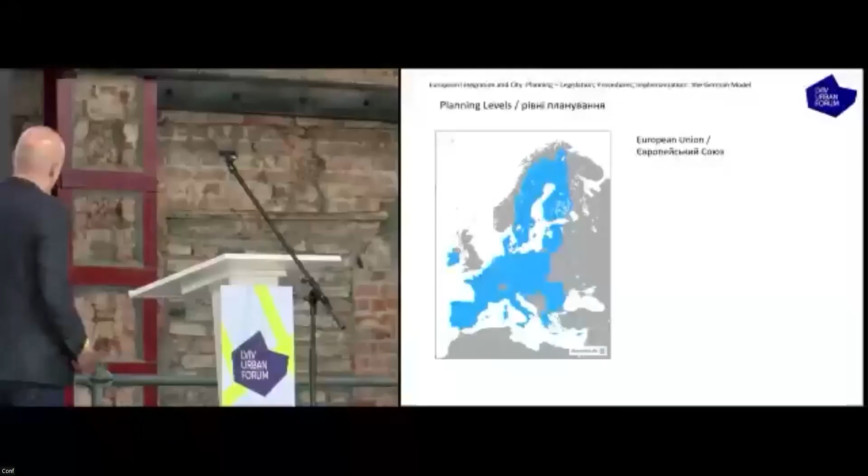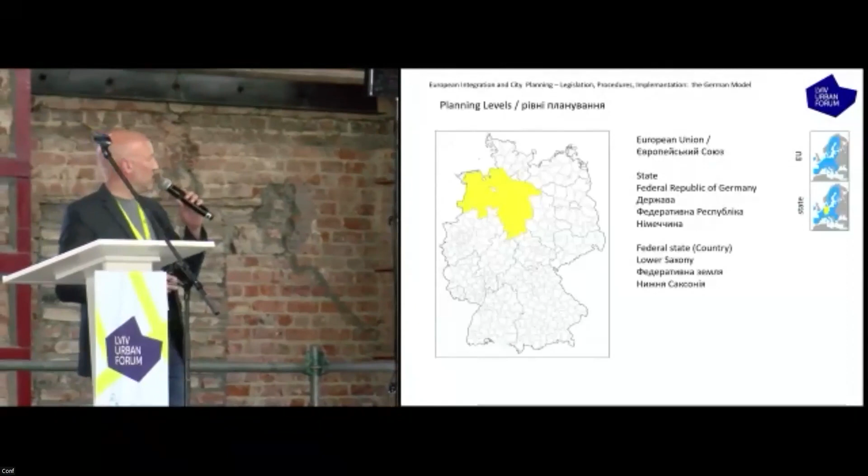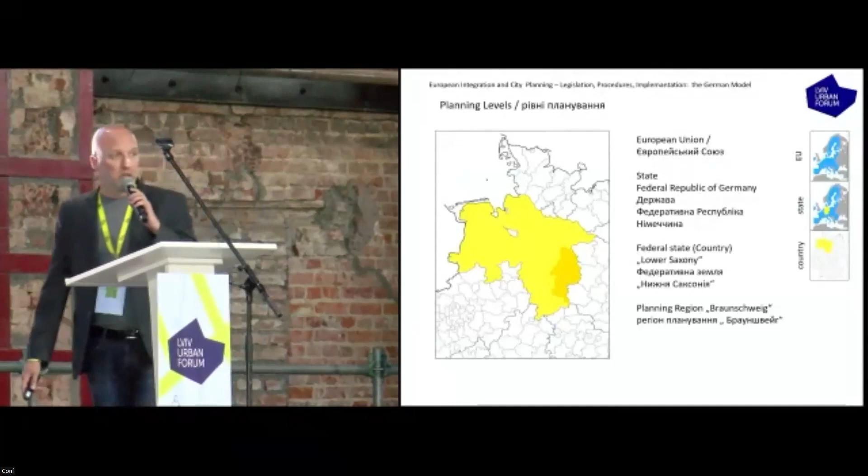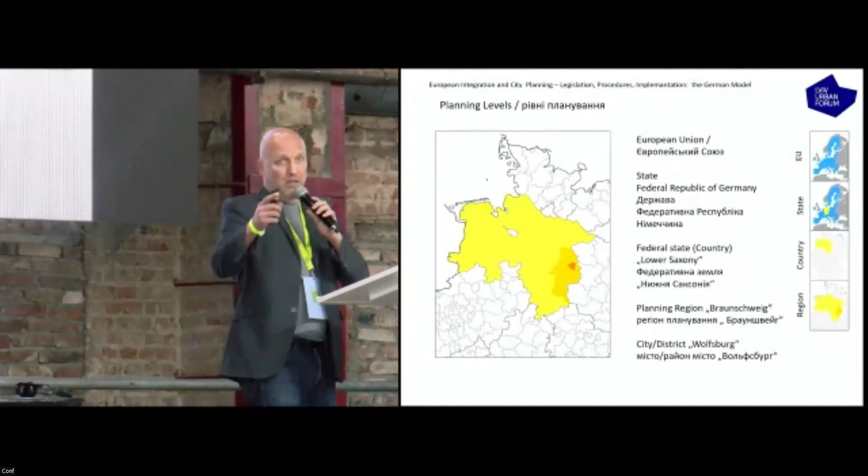I'm from the European Union, from the state of Germany, from the country - don't be shocked about the name, because there is no better translation from the German word Länder to English. This is the country of Lower Saxony, where I work in the region of Braunschweig and the city of Wolfsburg. So you see, you got 5 levels, and like Monsieur Duplantier explained in the last lecture, 5 levels is the same amount in Germany too.

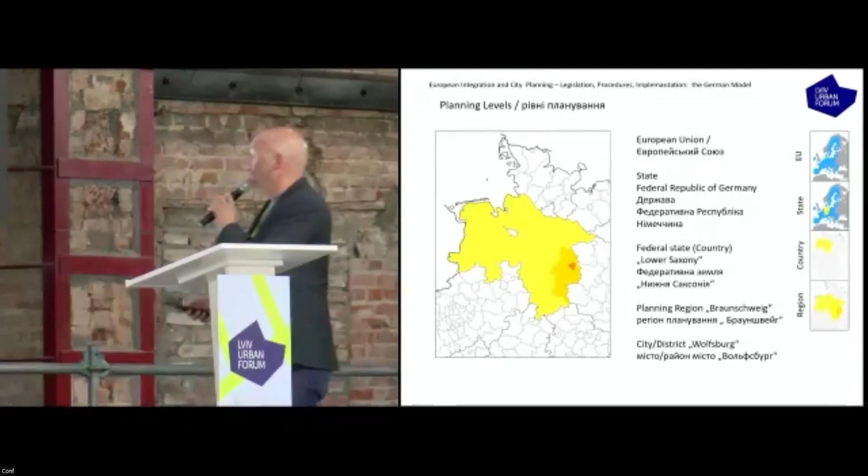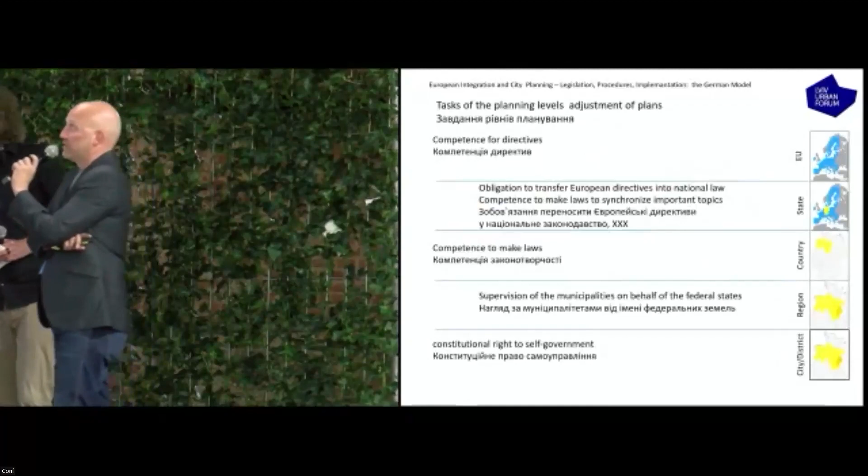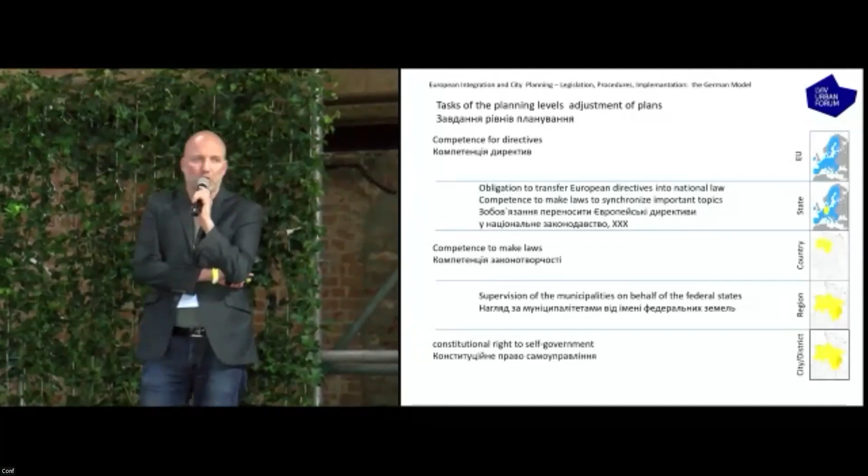So what is the task of this? We got different competences. We start at the European level - they have the main competence for directives. The state makes laws, and there's a special thing about Germany: the main amount of laws is not made by the government in Berlin, but by the countries one level below. Then we have a supervision and synchronization responsibility of the regional plannings.

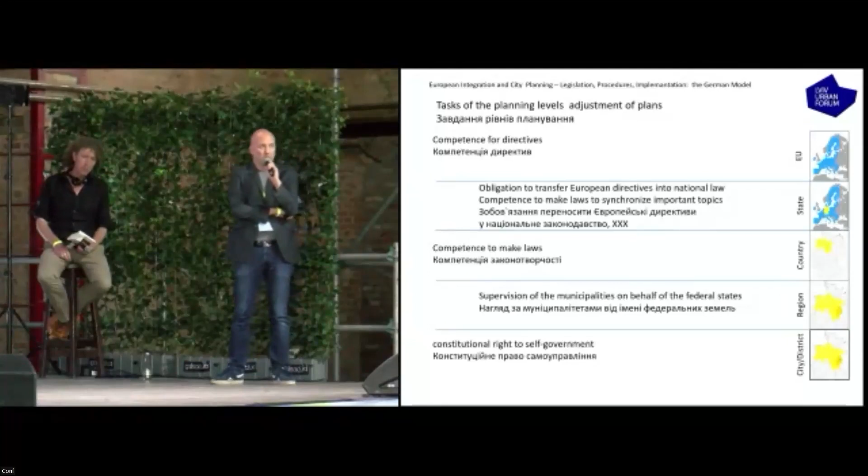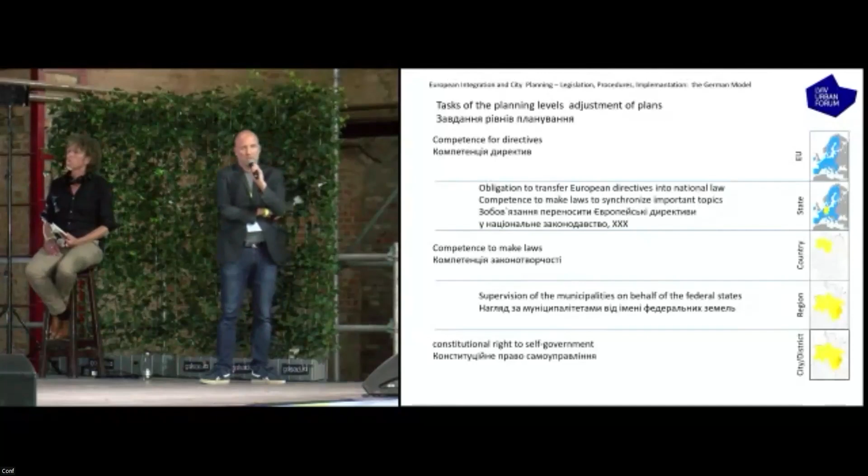And we have a constitutional right of self-government for every community. This is really important, because in the last lectures I heard a lot that you try to end the very central planning system in Ukraine. So in Germany, the self-government right is for the communities, and that's really important.

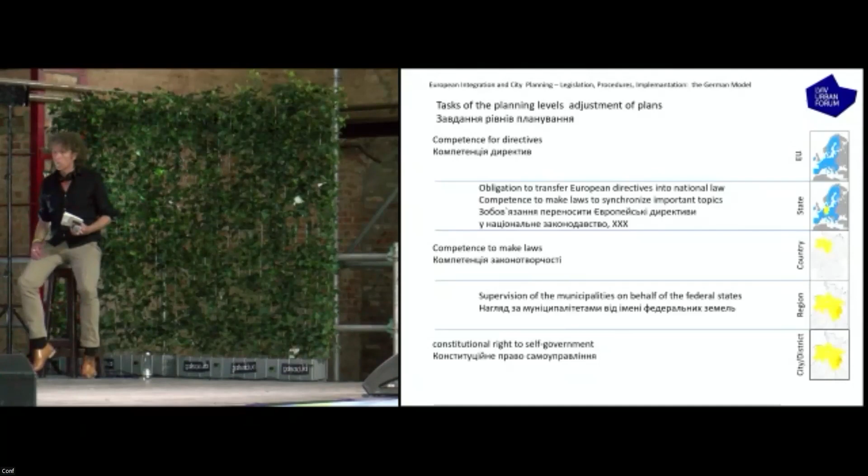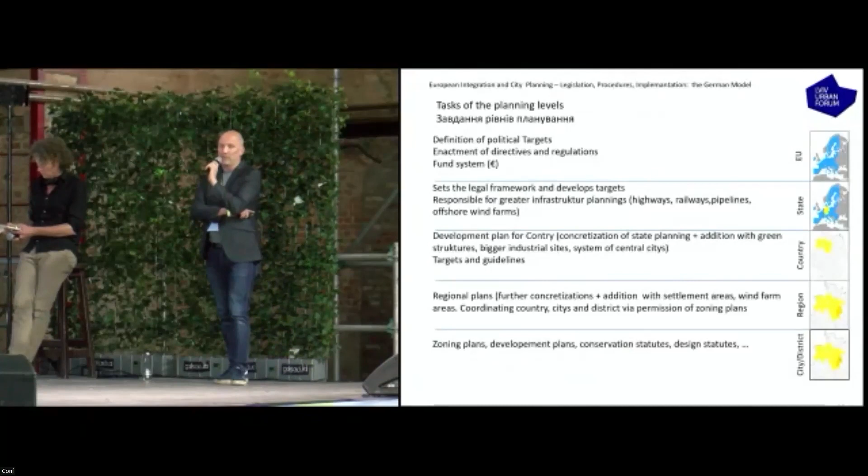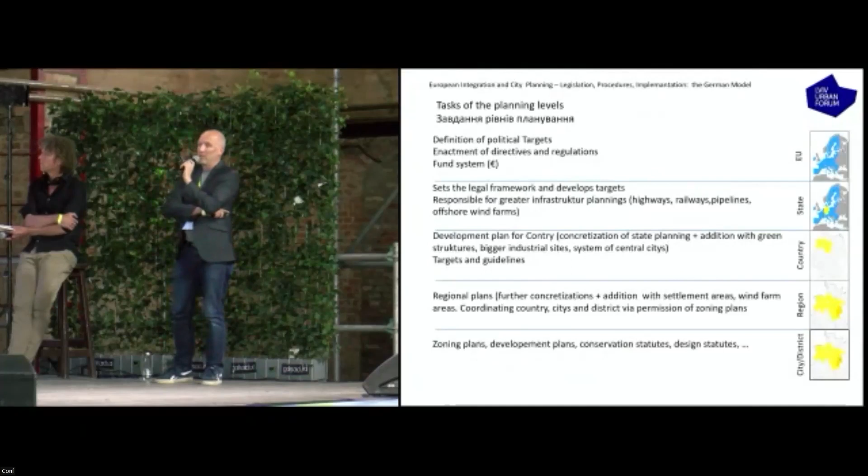And on these levels we have other kinds of planning. The EU defines political targets - they give regulations and directives which are concerned to be transferred into the laws of the member states of the EU. This is the work of the state government: to make these laws and plan greater infrastructure.

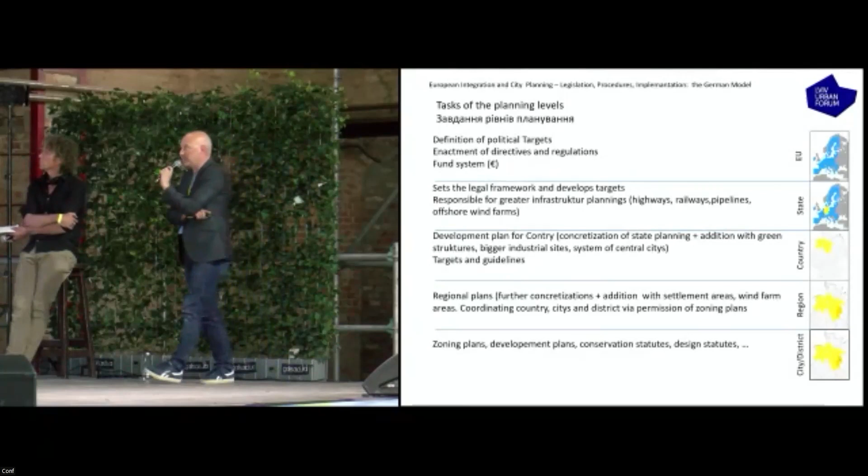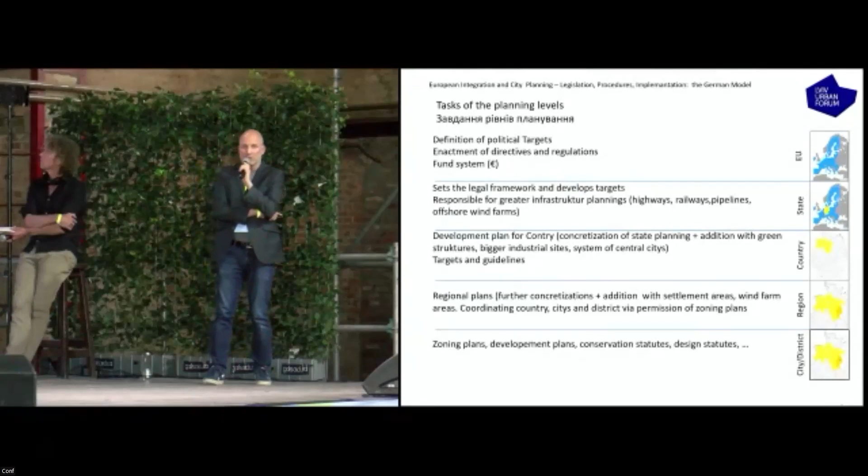And then we go down, and every next level has its own planning. So we got state and country planning, we got regional plans, and in the cities and districts we have zoning plans, development plans, and even conservation statutes - I'll come back to that later. This is the Ukrainian translation.

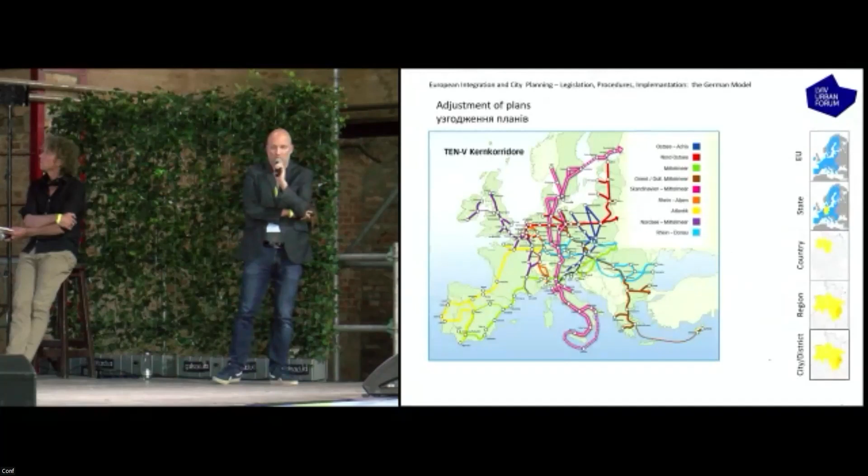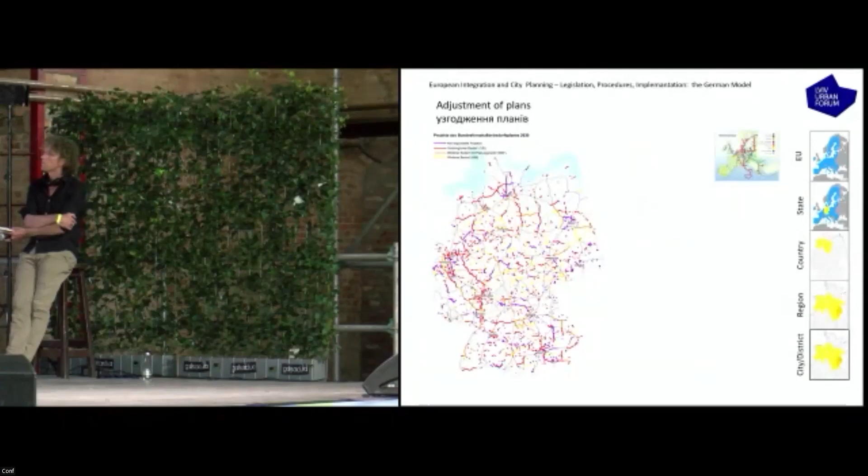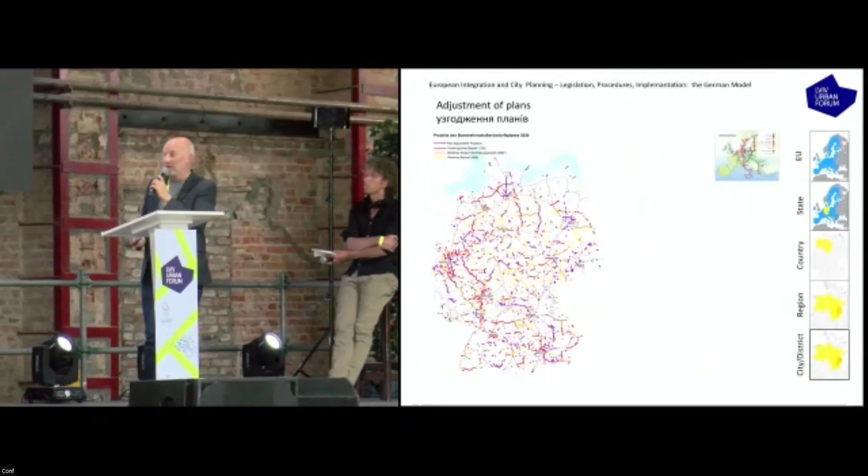Next level, state planning. This is the plan for infrastructure for highways in the Federal Republic of Germany, and you see here a lot of highways which we build, build up, or improve.

Then we go to the next level. In this map, you can imagine there is a line for the highway which wasn't showing on the screen for the pointer, so I had to check it up for you. Okay, so you have a highway line there.

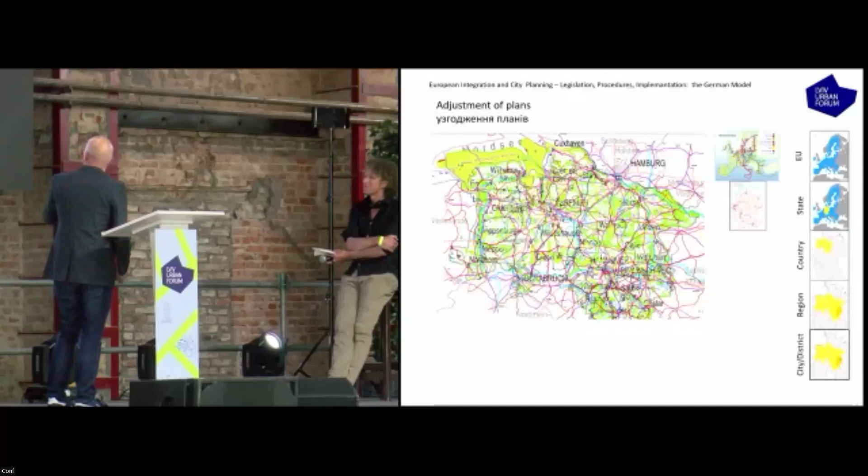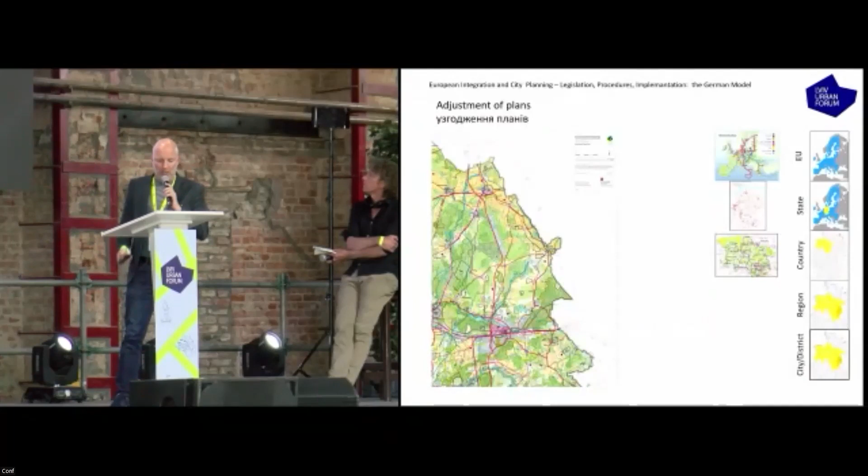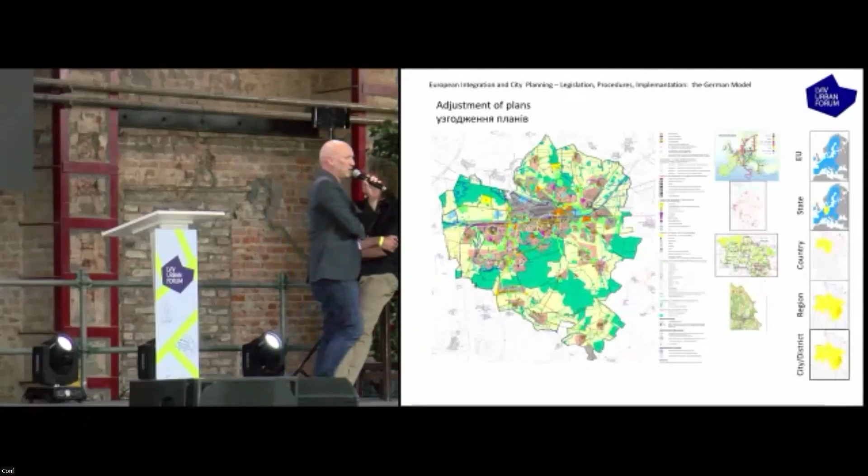Then we go up to the regional plan - you see a big red line coming up from top to bottom. This is the highway, and on the level of the zoning plan for the city of Wolfsburg, you can find this highway again. So this is a perfect way from the European idea to the state, to the country, to the regional planning, and then to the city - we are just synchronized. Top down.

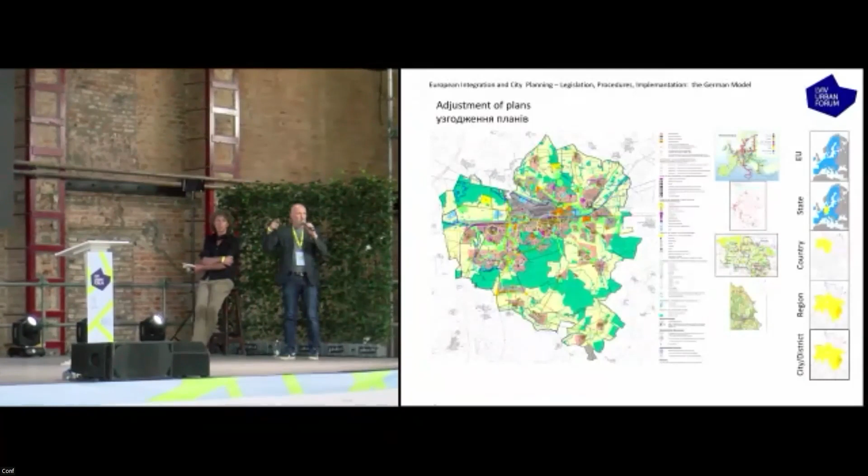What about bottom up? We got this countercurrent principle - that means not all ideas are ruled from Brussels down to my city, but of course we have a way from bottom up. This means everything at every level has the obligation to adjust their plans.

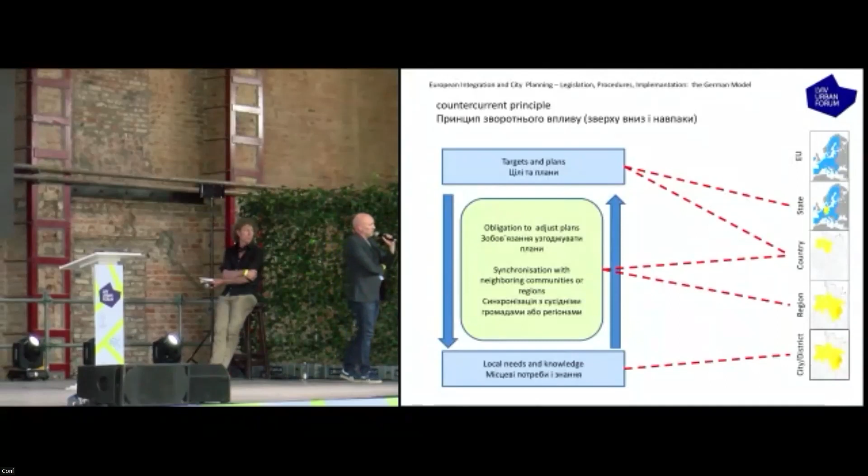So if Brussels says this is the highway track, the main direction, okay, we synchronize it to the city level, but we also have needs, and we often have knowledge about our location. This locational knowledge is impossible to have in the ministry, in the state government, or even in Brussels. This means we take part in the decision of where this highway is located.

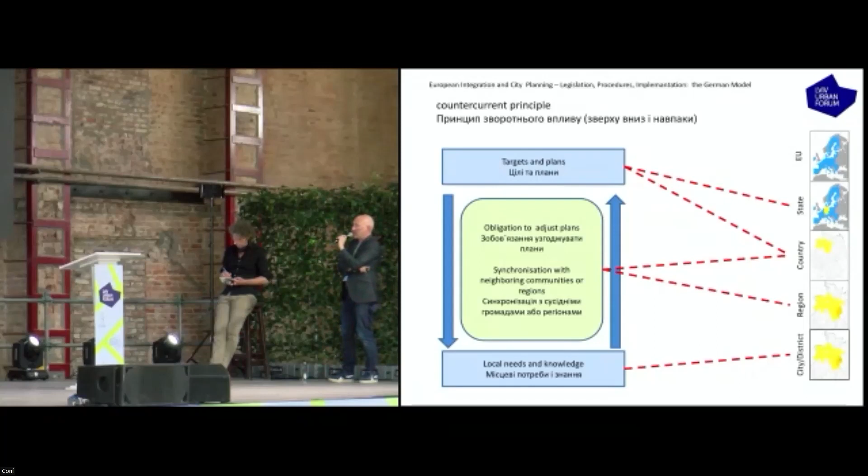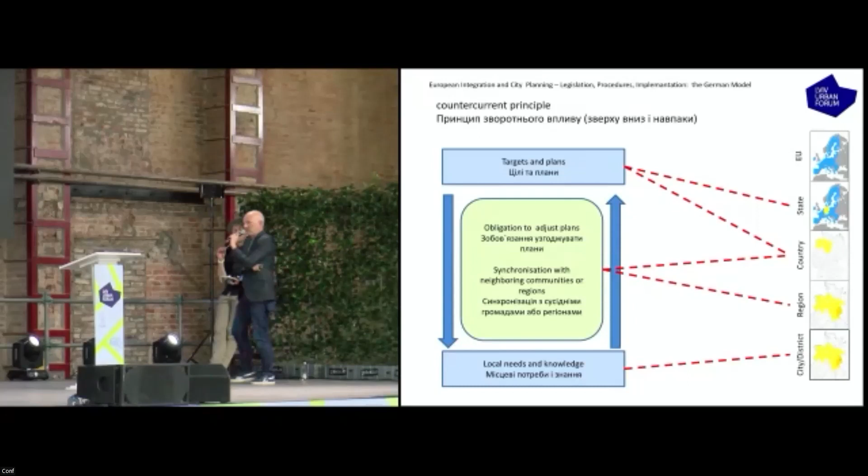And also we are urged and responsible to synchronize our plannings with all our neighbors - the cities in our neighborhood, the districts in our neighborhood, they have their own interests, and we have to make sure our plannings don't disturb the development ideas of these neighboring cities and districts. The responsible planning level to coordinate this synchronization is the region, the second level.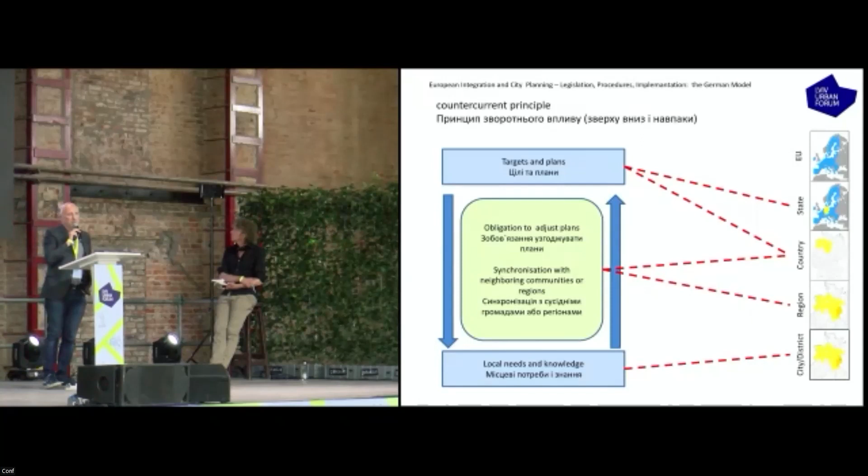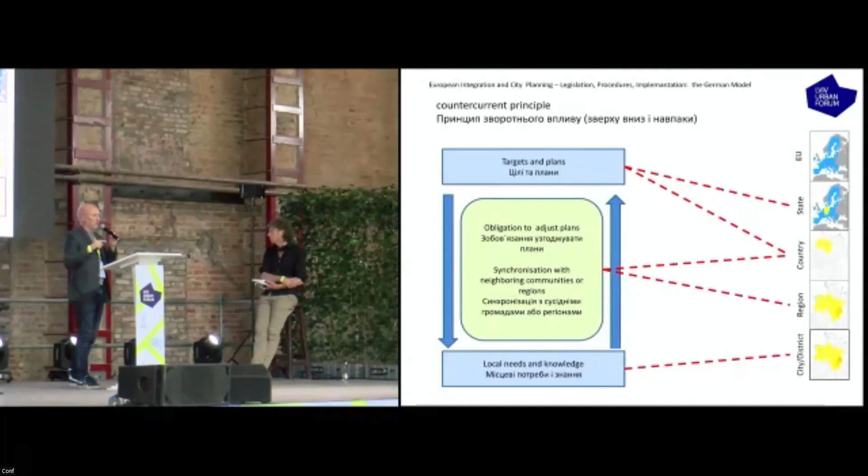In this regional planning, we have all cities sitting together in the regional planning area, and they have to make this plan by a decision which is a common decision.

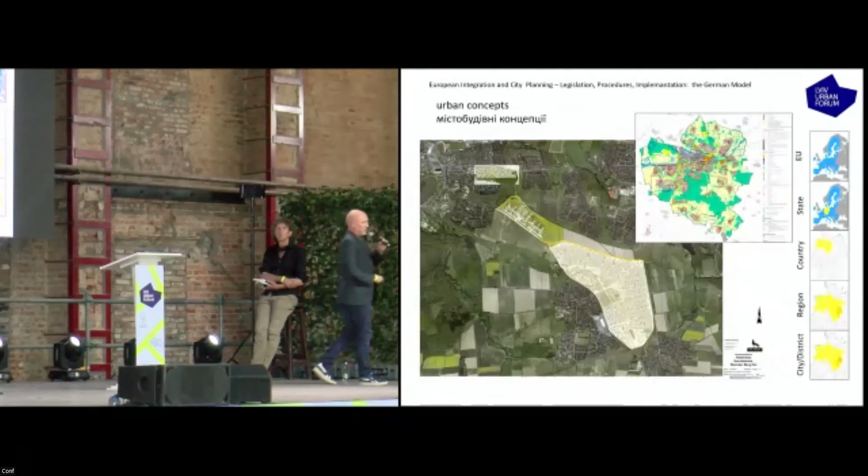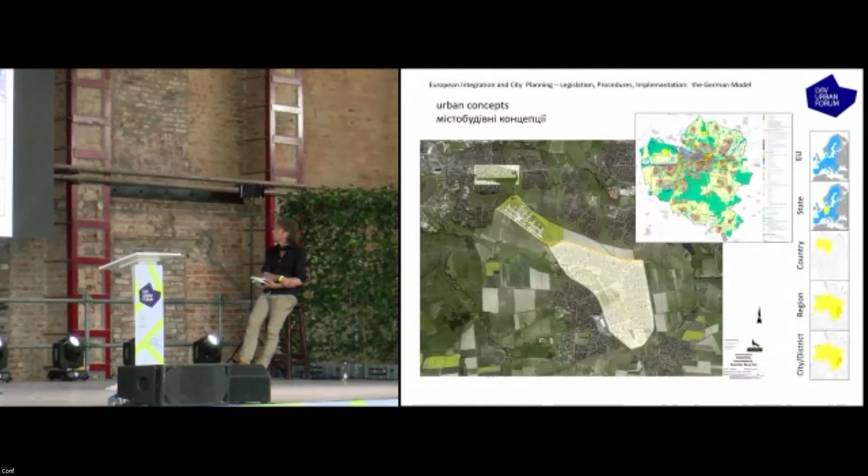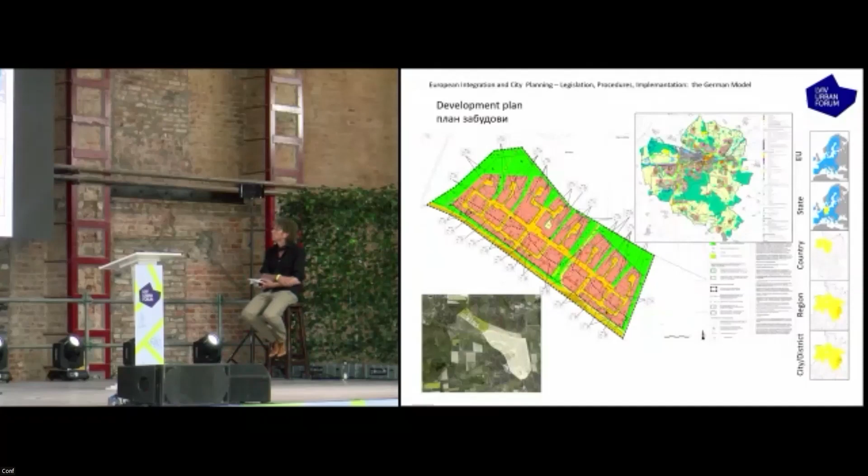And so we go bottom up. This is the planning of a settlement in Wolfsburg. We were defining some years before, and you see the zoning plan, and from this planning, we make a development plan. This is the legal law in our city for developers, buildings, and owners.

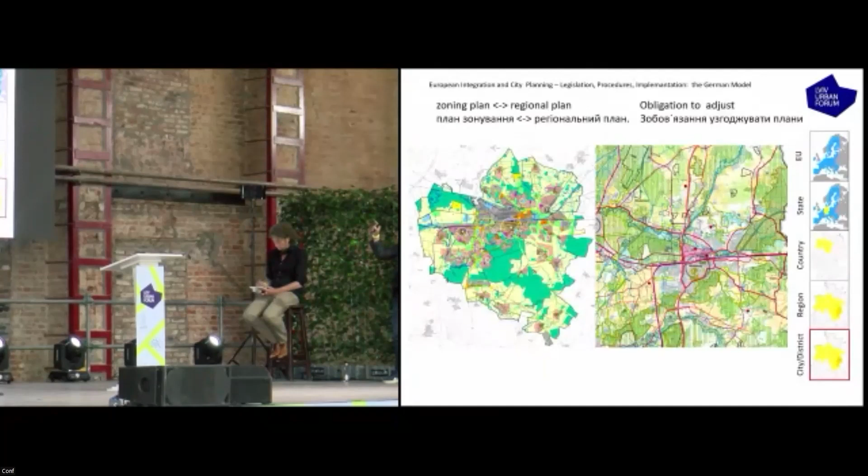And now we go up and say, okay, the settlement took part in a place where we decided in our city this place is a good place for a new settlement because it's close to the city center, it's well located to the infrastructure, to the public traffic system and so on, but in the regional plan it was a farming landscape. So bottom up means we go to the regional planning and say, we negotiate this plan by ourselves, based on our knowledge for our city, and say we want to change farming area into settlement area.

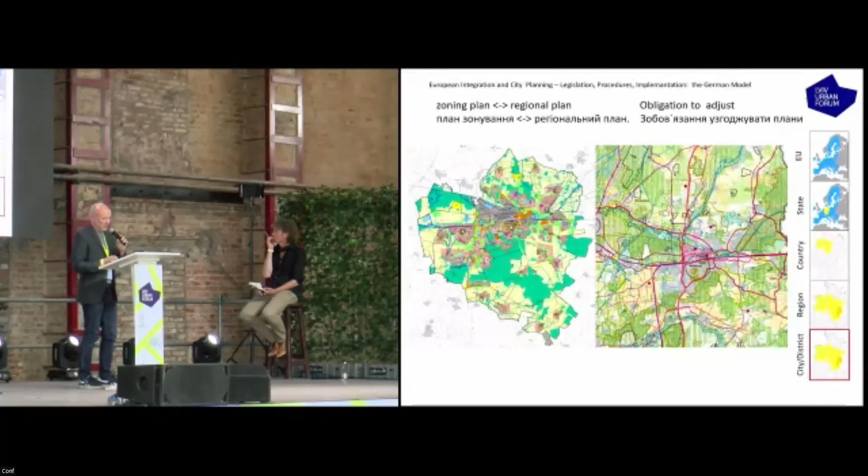And we have to apply for it, of course. It's not a self-fulfilling wish, so they have to negotiate with us. And these negotiations sometimes are very difficult.

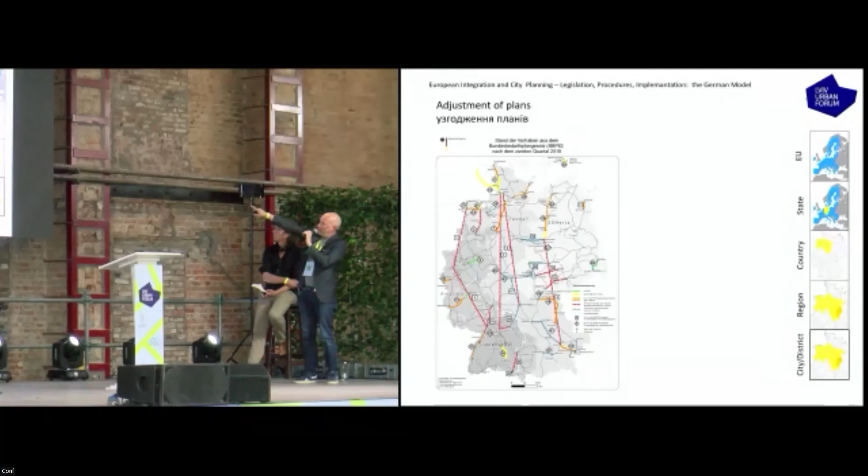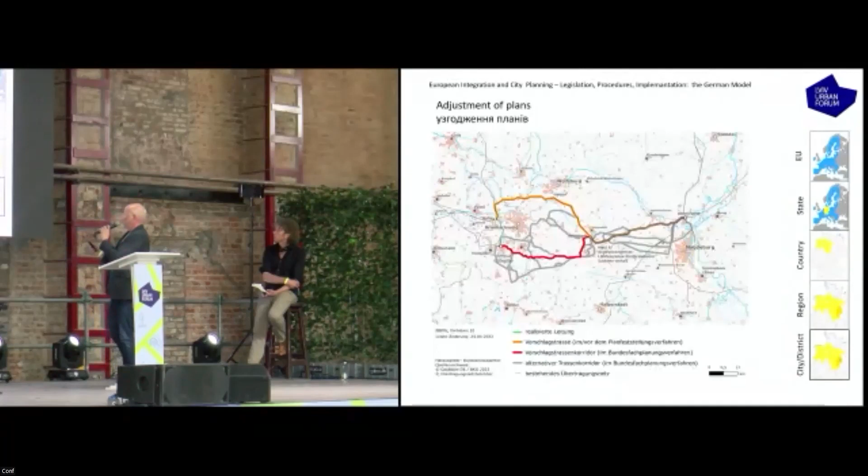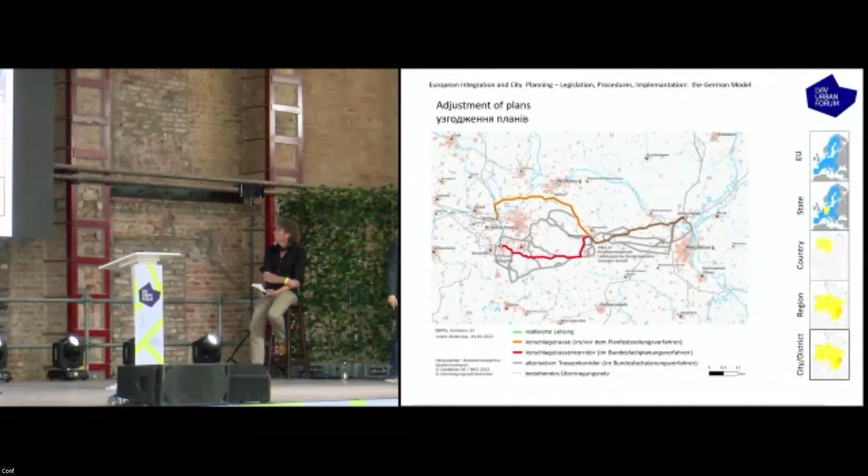You see here a map from the state government from Berlin, which is dealing with high voltage power lines. And in the middle, you see a thin blue line, number 10. It goes straight. Okay, that's the plan. We need a power plant line from there to there. But concerning all these regional knowledges and the rights of the cities and districts, in the end you see a lot of ways which have been checked, and in the end the orange and red one was the final solution to make this high voltage line.

Why all the other lines didn't work, I don't know exactly in detail.

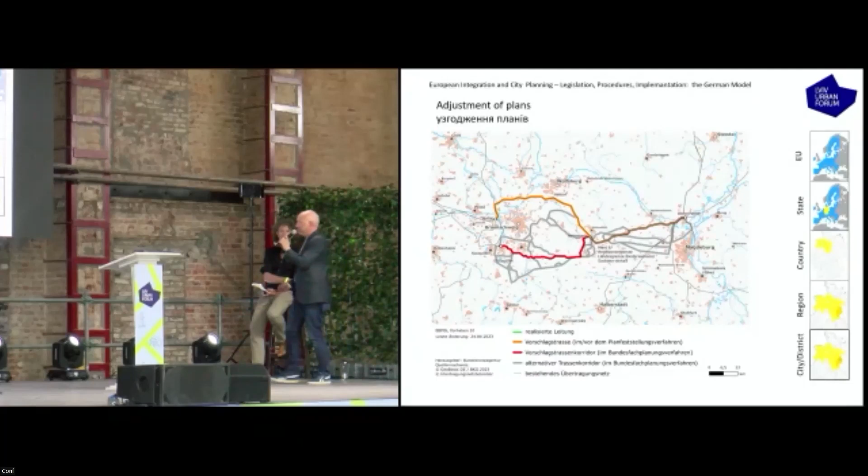Okay, what is inside a zoning plan? As you can imagine, we have a plan for the entire use of the city. It's not about heights or densities or architectural qualities. It's just for the use of the city.

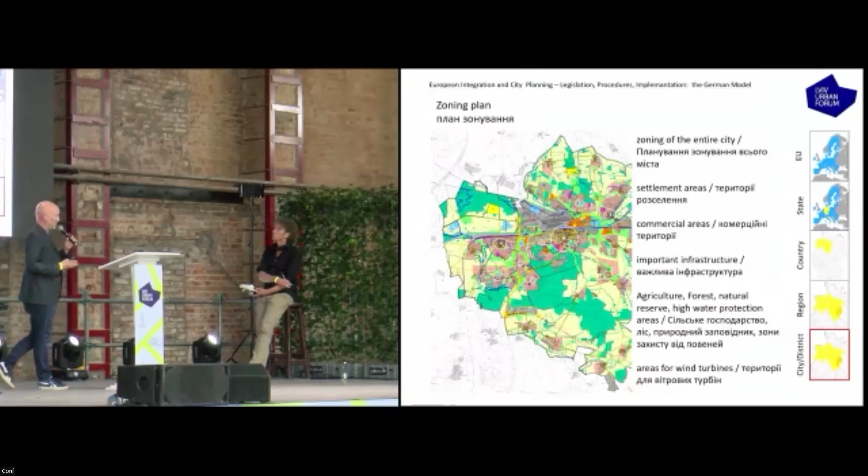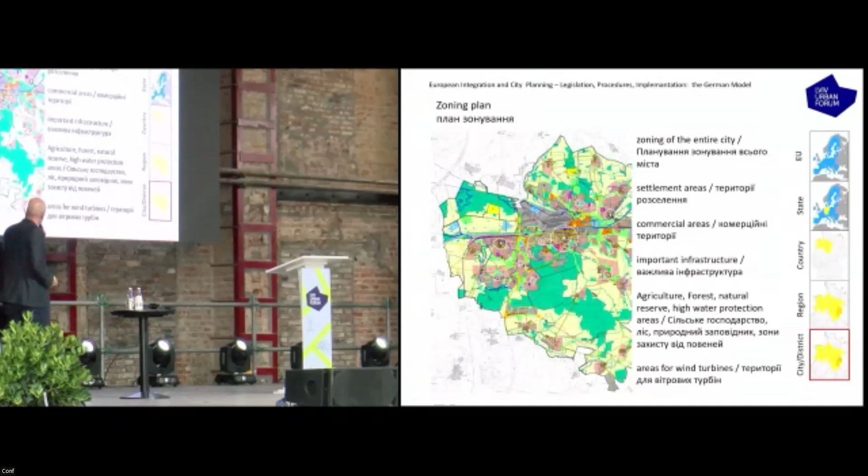And there we have the most important things: settlement areas, commercial areas, important infrastructure, such as water supply, water treatment, landfill, and all the other important things a city needs. And we have agriculture, forest, natural reserve, high water protection, and also areas for wind farms, wind turbines. This is all inside this plan, and this plan is decided by the city council.

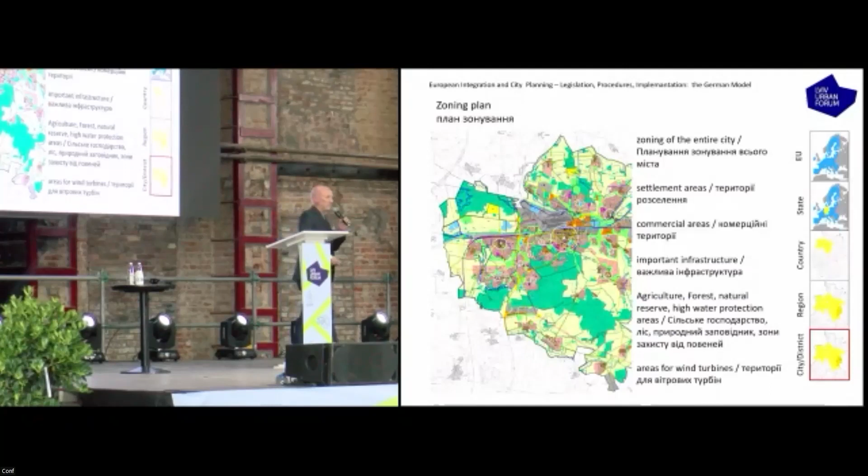So we make it by our own, and we have it decided by a city council decision. Next, further down, this is the development plan, and this development plan makes rules for the kind of use, for the density, heights, streets.

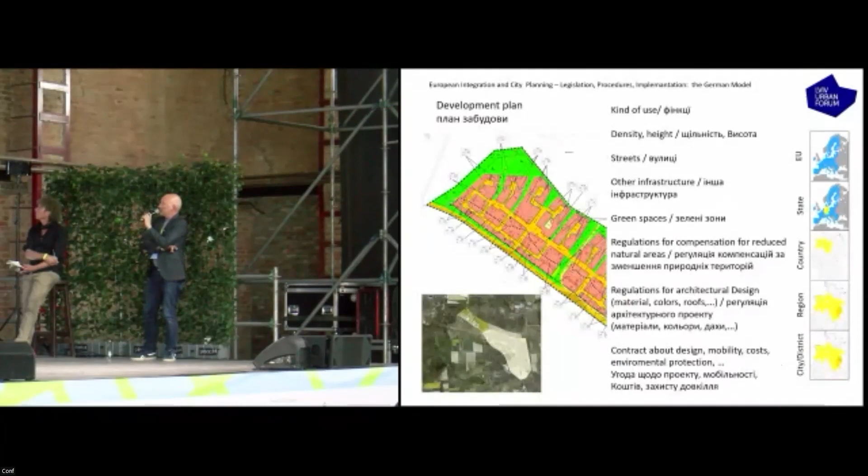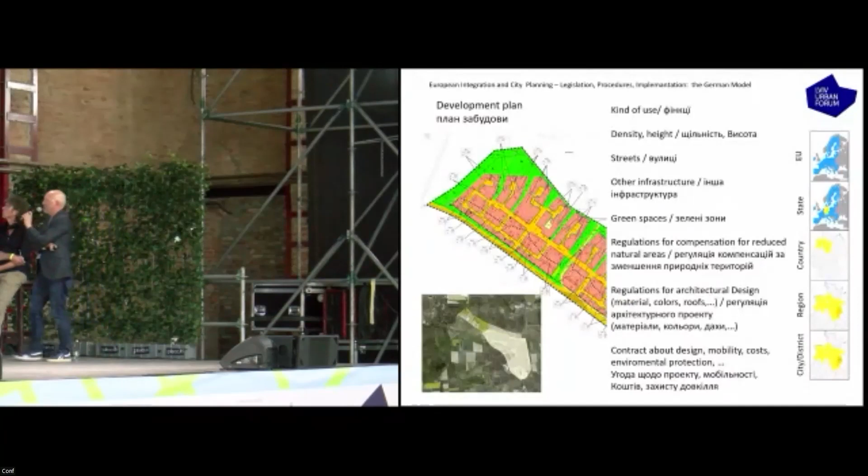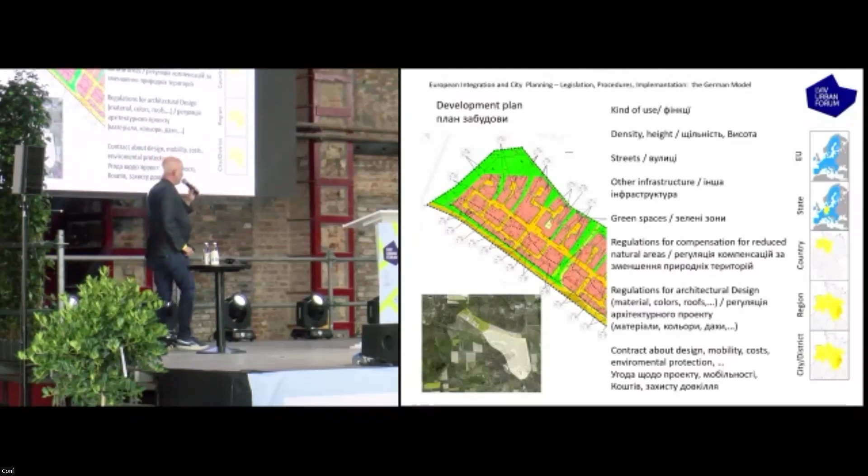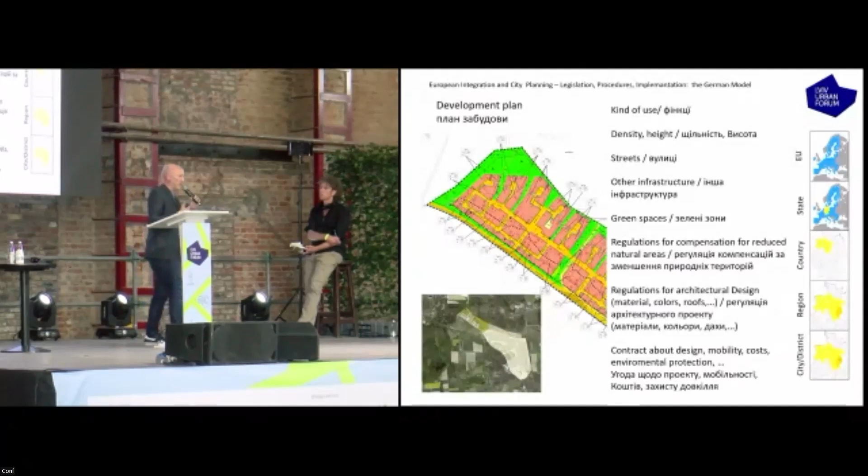He deals up with all the nature, let me look for the word, environmental protection stuff. And this is the point where the regulation and directions from the European Union come down to our planning system, because we have to make sure that the direction of the European Union for water, for high water risk, for strategical checks of natural reserve areas took place in this planning, and we have an answer for all these topics.

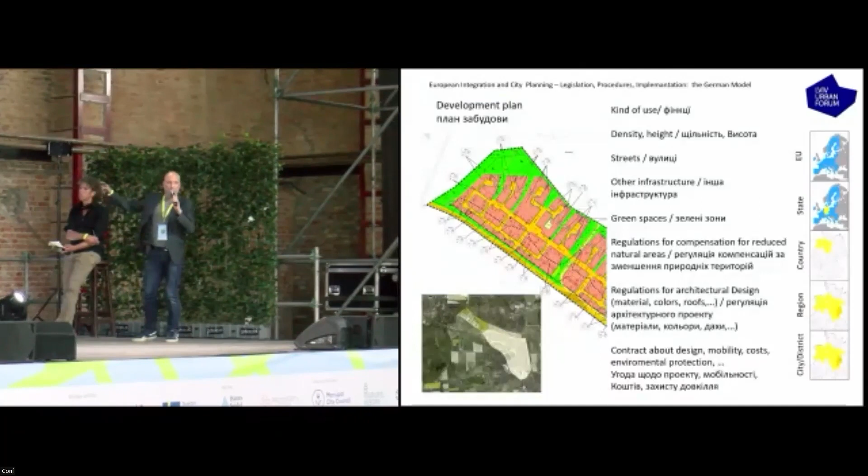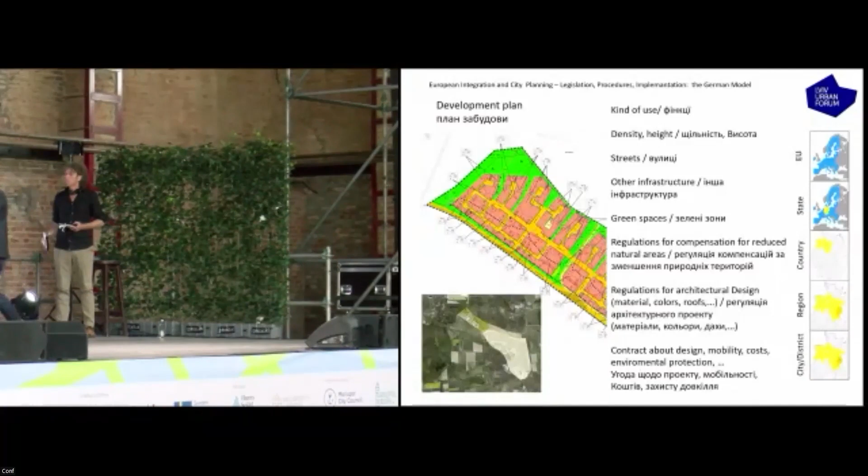So as you can see, and this is the point from yesterday evening from the discussion I had with Anton Kolomyetsev, we even have the possibility to make contracts with our developers about these plans, and in these contracts we can negotiate. They pay some costs for infrastructure, and we make regulations for the architectural design, even for material, colors, forms, roofs, and so on. So we have a lot of possibilities to go on with this plan.

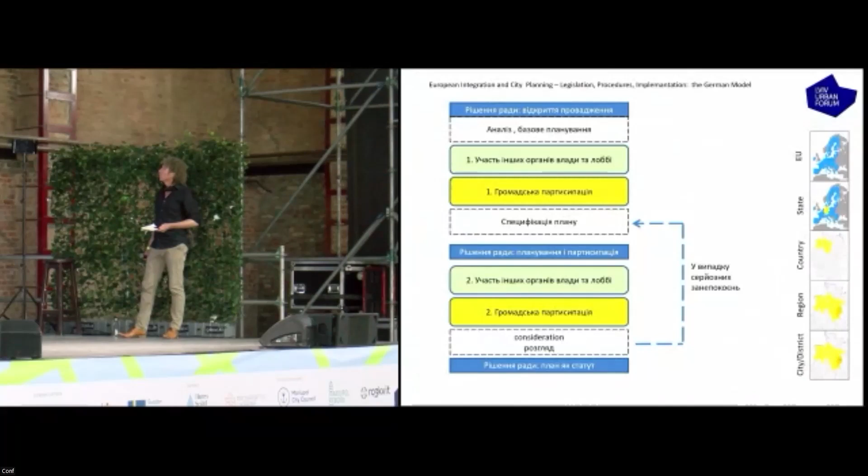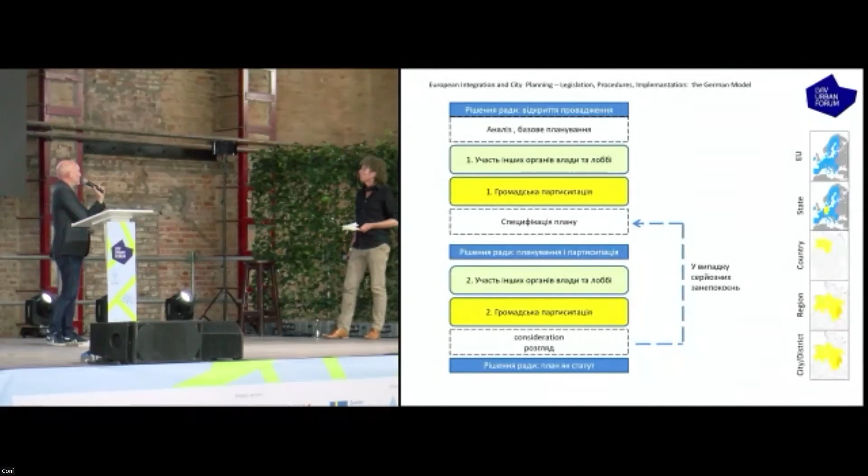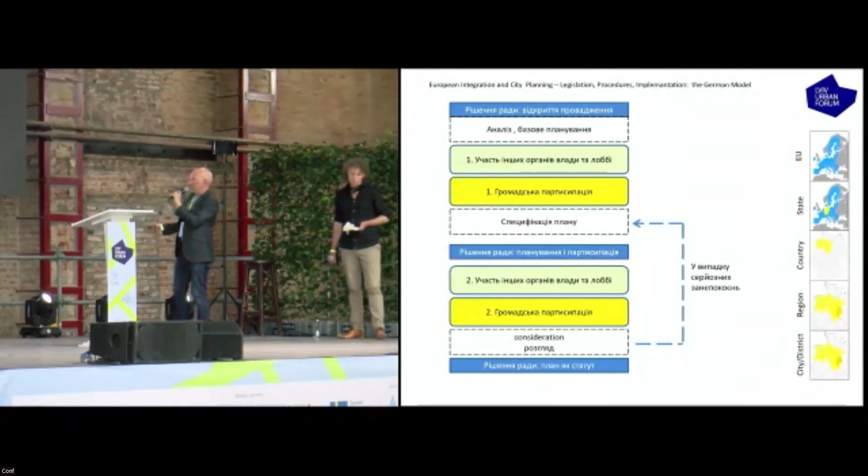And now you look at the time. Okay, this is the process. We make an analysis, we make a first plan, we then go to participate with all other stakeholders inside the city and around. Also the neighbor communities and neighbor districts are participants in this process. Then we go on and work more definitely and more defined on the plan, and then the second participation takes part. If we get some serious criticism, we go up and repeat the procedure until we can be sure that this consideration in the end is something that is safe.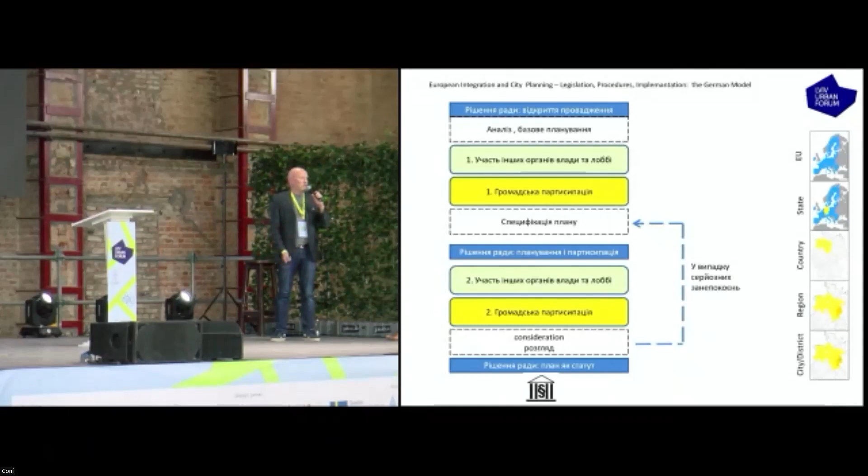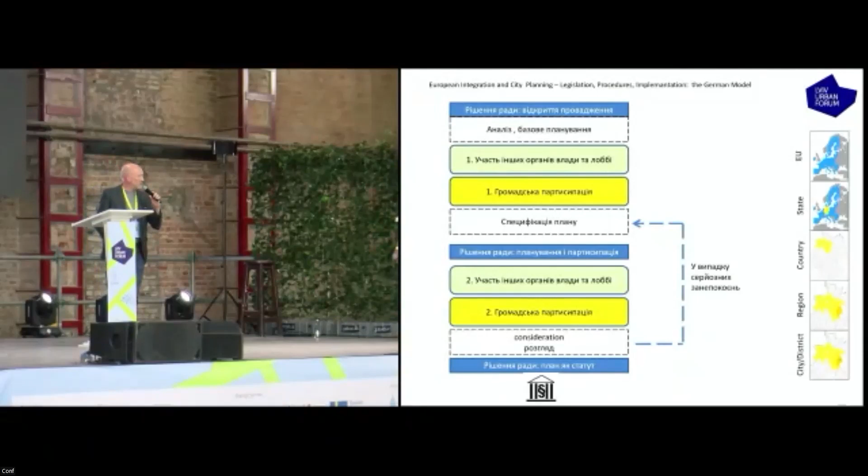And then the council makes the decision for this development plan. And this is not the end, because every stakeholder who took part in the participation is able to go to the court and check out the plan concerning all the laws, directives of the European Union and all other things, and the effects which this plan is giving to the people.

So can I ask you to wrap up, Marc? Okay, is that the last one?

Almost, please. This is the checking list in the court. I have some questions for you.

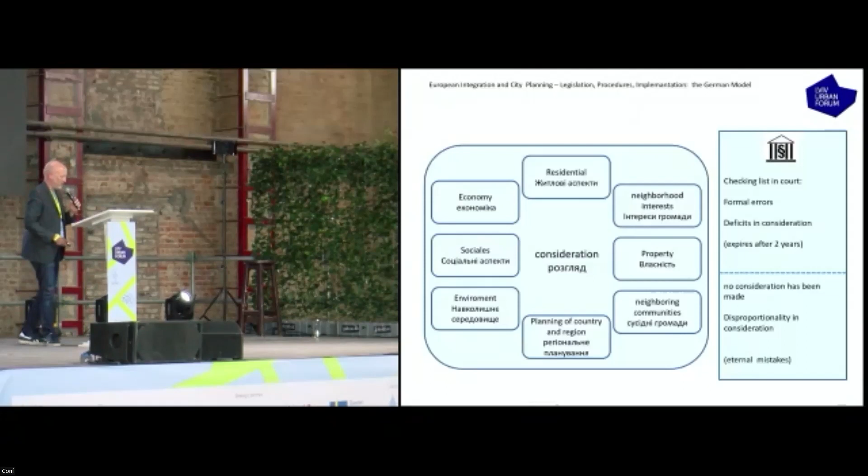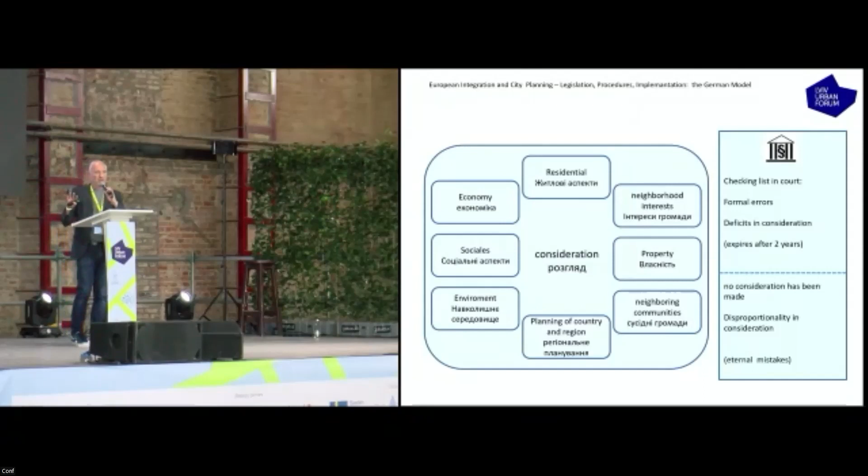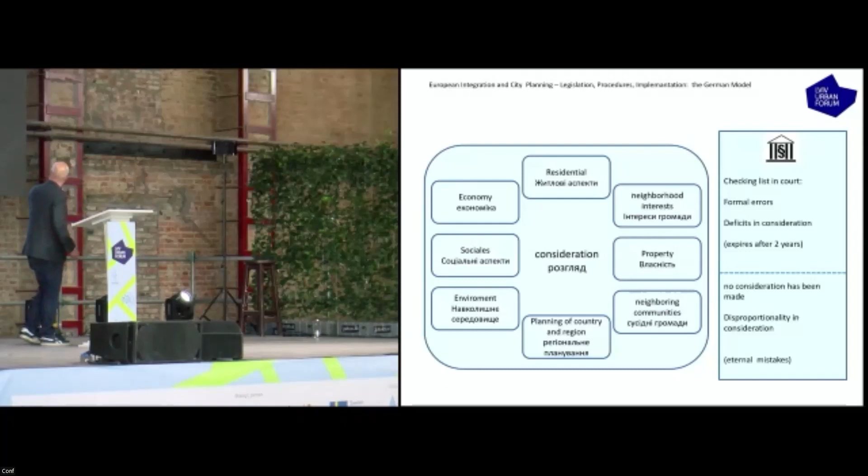This is the checking list in the court. So they first check the formal things, then of course they check the deficits in the consideration. This is not so bad, because the first two, after two years, it's quit, so no court decision can kill the plan. But down there, the no consideration and the disproportionality of our decisions is a thing which kills every project and every plan, absolutely unimportant if it's decided by the council.

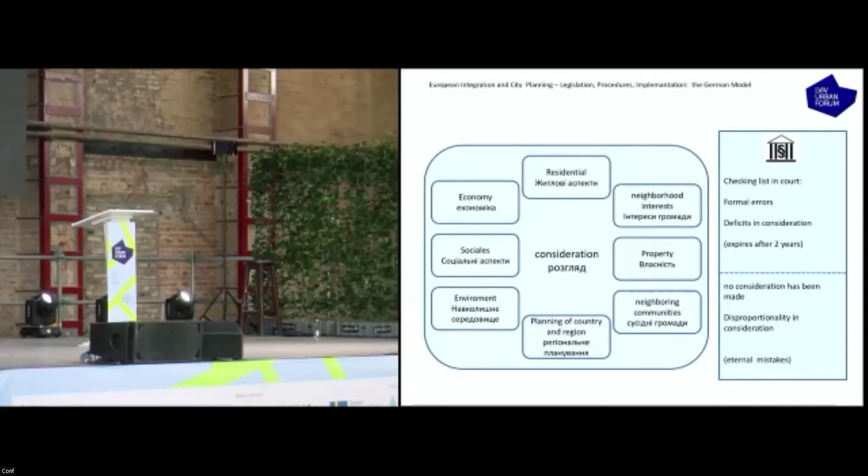And now to the questions. Yeah, that's the slide I was looking for. Thank you, Marc, I have one, or actually two. 15 minutes, well, good job.

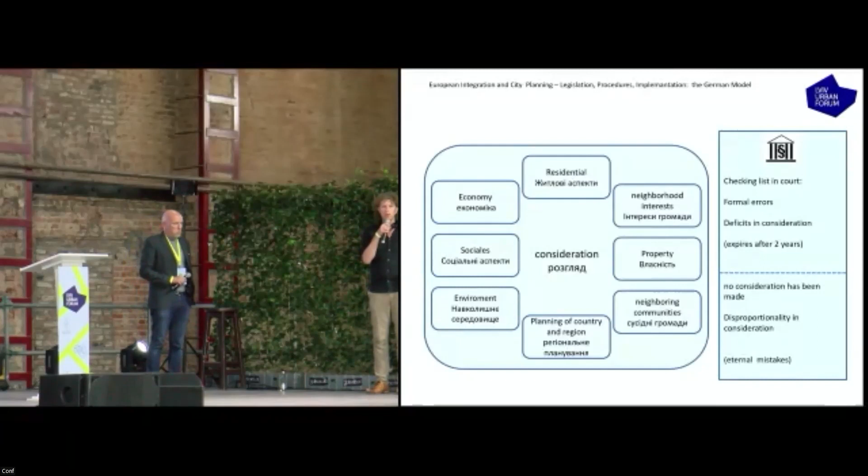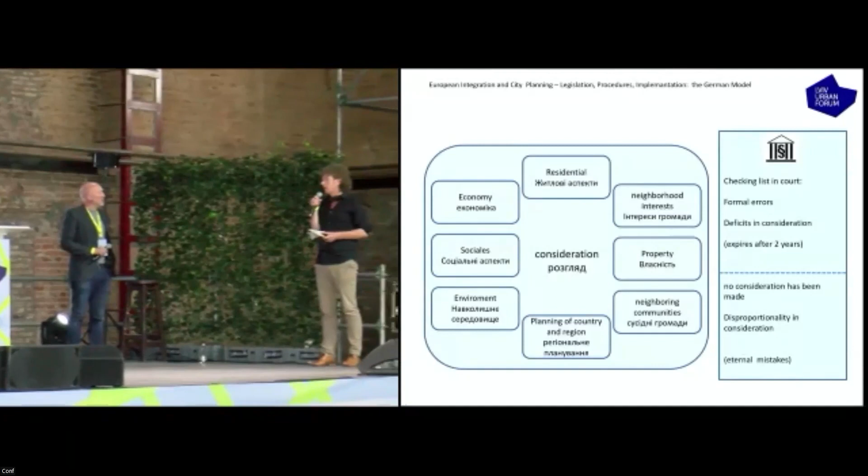These negotiations, you showed in the end the picture of going to court. But before that, to explain, in Ukraine very often when different levels of politics, or different levels of state and city or neighboring cities come together, it's very often right away the head architect and the mayor, and they try to make decisions as soon as possible. But I wonder if in Germany it is the same. Is it going like that, or is it more like thematic partners, specialists on certain topics who first negotiate? How does it go? Can you explain how this negotiation, as you call it, looks at the first start?

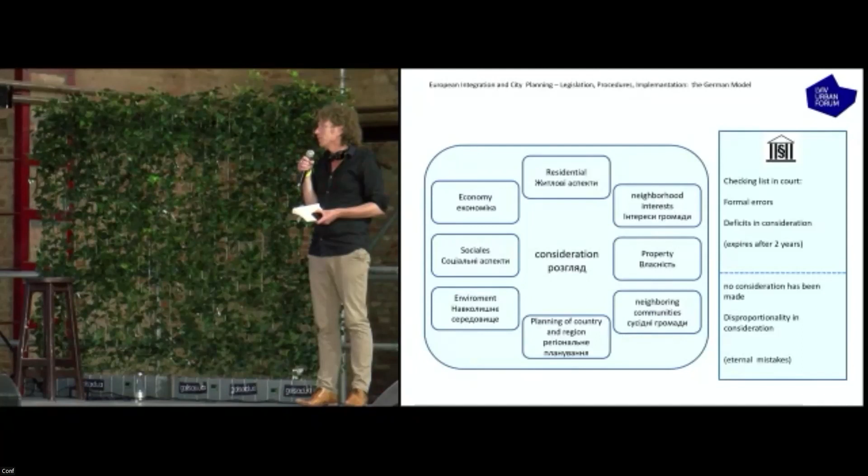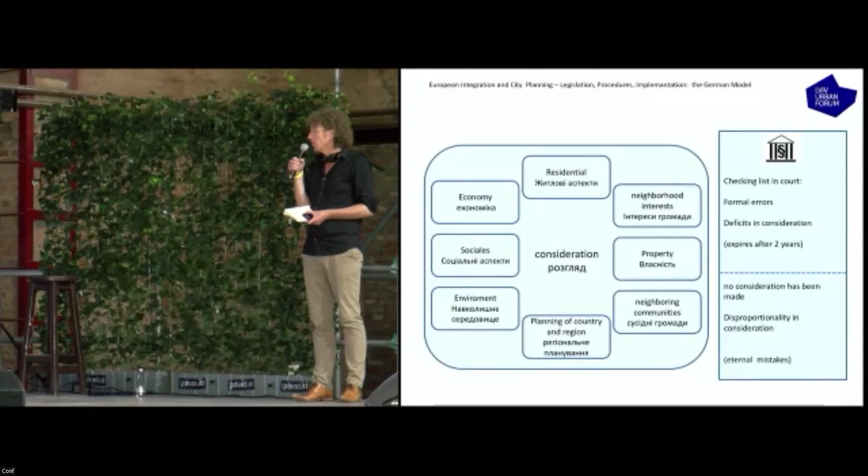Well, start with the situation that the developer comes with a plan for a project. So the first thing we do in the administration, of course, is check if this is good for the town, because we have our development plan. The decision is always made by the city council, but we in our administration prepare and check it. We have this specialist view on these developments, we prepare a decision, and we also advise our city council and our politicians.

But you can be sure that with bigger projects you always have a public discussion. They go to the newspaper, they show, hey, we want to build new settlement sites or new shopping centers and anything like this. This is the point where the public discussion starts, and that's why it's so important that we have this participation process. The law says, or we are urged to make two participations, but mostly for important things we are there for public discussions. We make workshops, we go to the political parties, we make sure everyone is informed and can discuss and give his issues, needs, and concerns into this process.

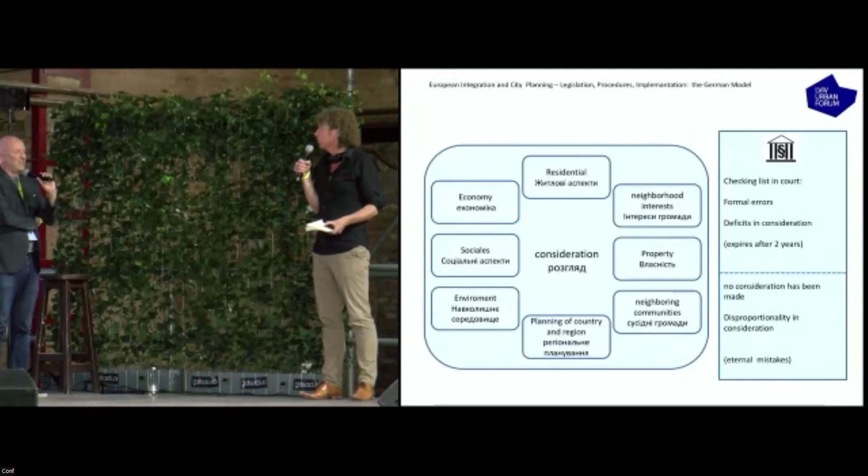And who organizes, who is the leader of this process? Is it the government, or the private developer, or can it be both? No, this is a formal process, and it's our responsibility in the administration to do that.

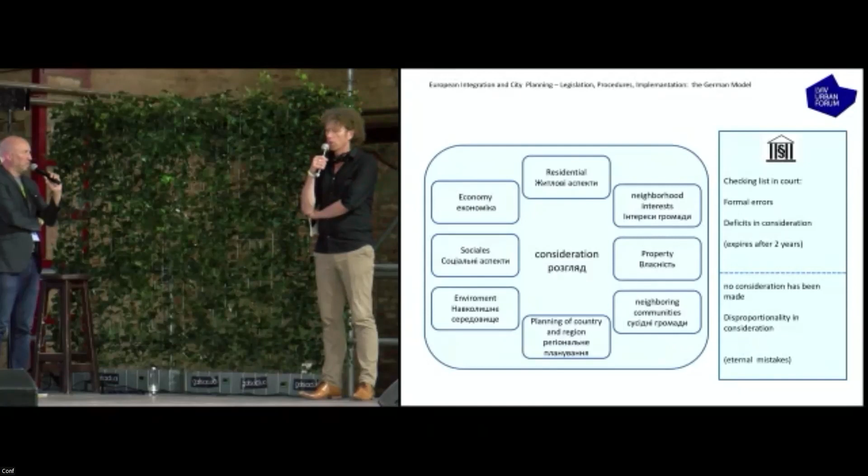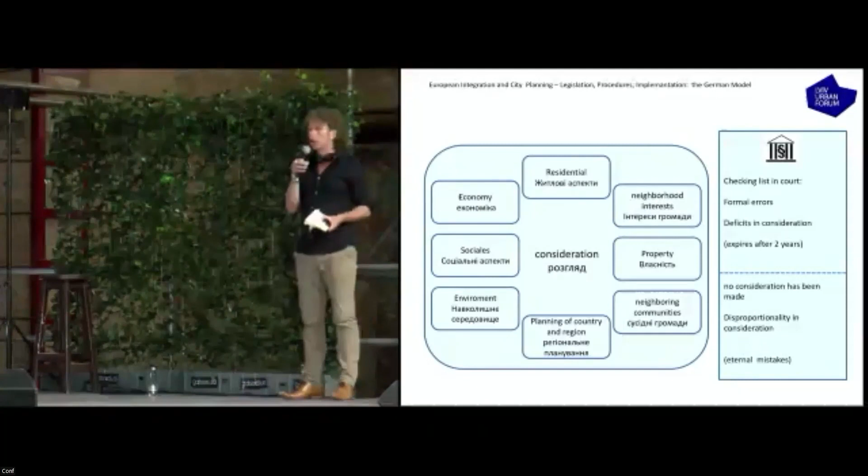Okay, then the second and last question. Of course this has not been like this forever. This process, this way of working, started decades ago. Ukraine is now at a situation where they may be transforming their processes, their legal context, towards maybe a process like this. What would you advise from a historical point of view? How did this change happen in Germany, and what could you learn from that?

Thank you for that question, but we prepared that question. Yeah, we prepared it, you knew it was coming. No, we don't have the exact point in Germany when we changed our system.